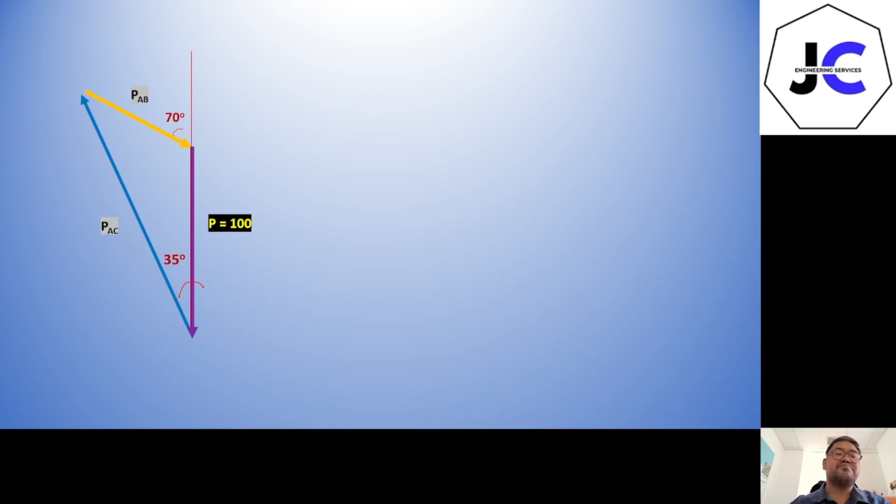The angle here is only part of a straight line, and there's also an angle of 70 degrees. Since a straight line angle is 180 degrees, this one is only 180 minus 70 degrees, which is equal to 110 degrees.

Now, to complete the triangle, we use the theorem that the sum of the interior angles of a triangle is equal to 180 degrees.

So the remaining angle is equal to 180 minus 110 minus 35 degrees, which is also 35 degrees. Okay, so now we have completed the angles inside the triangle.

Then we have one given side. So we're going to use the sine law to solve for PAB and PAC. Okay, so we have the sine law.

For PAC, the opposite angle is 110 degrees. Then for the 100 given, the opposite angle is 35 degrees. So PAC over sine 110 degrees equals 100 over sine 35 degrees.

Now cross multiply to solve for AC. You have 163.83 kilonewton. So that's the answer for AC.

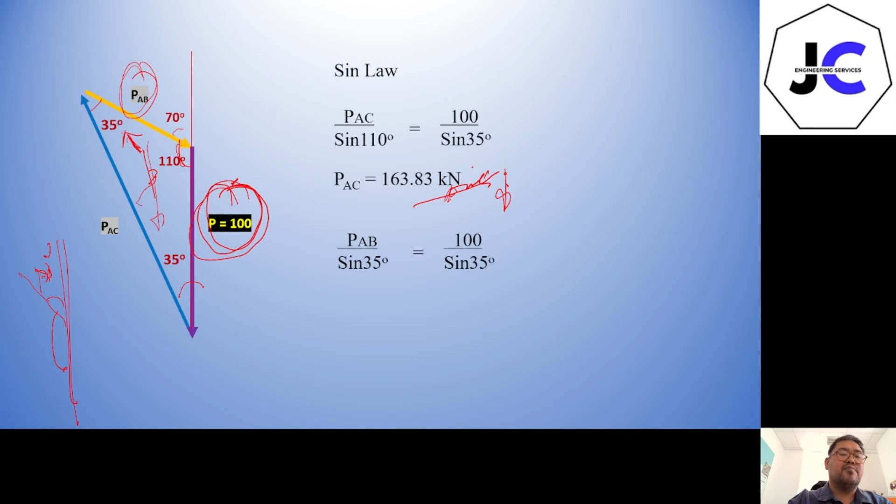So using the given, we have PAB over sine 35, where PAB's opposite angle equals 100 over the same opposite angle. So we cancel the sine 35 since it's the same denominator, and PAB is also equal to 100 kilonewton. So that's the answer.